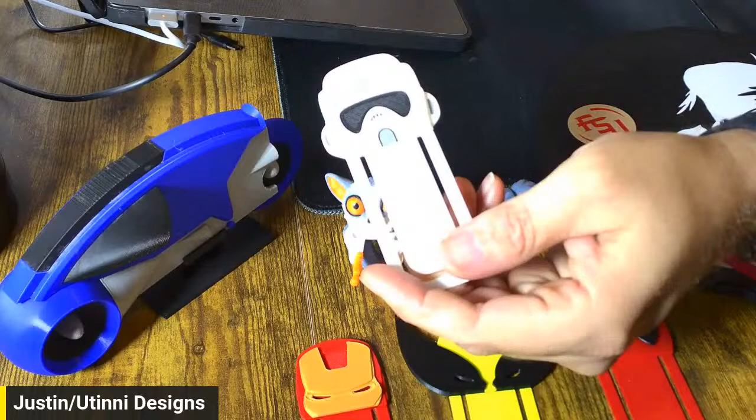Now you have different types of multicolor prints. You have prints that actually print multiple colors in one print, like this. So it prints the white first, then it goes to the gray, then it goes to the black, and then it goes back to the white, and it keeps swapping colors until you have a finished product.

Same with this. This is a multicolor print, only 2 colors. This would be a 2-color print as well, and another 2-color print. Here, this little guy has multiple colors. So you have the gray, the white, the orange, the black. So there's 4 colors in this little guy, in this little flexi.

This bike, this Tron light cycle, is technically a multicolor print, but it's done in a fashion that you print different parts in different colors. So you don't have to have an AMS unit to create something like this. So you'd print the wheel blue, you'd print the fuselage blue, you'd print each of these windows separately in black, this window separately in black, this in gray, the chassis in gray, the rear wheel in blue, the rear wheel inserts in black, and then you snap them together or glue them all together.

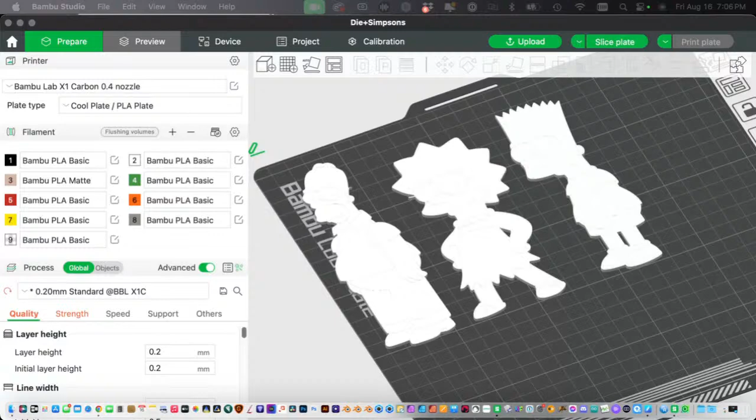So you can do this with a mouse if you want. I'm going to be using my tablet and a mouse in conjunction to paint these. So here we got some pretty recognizable characters. These are the Simpson characters. When you bring in STLs into Bambu Labs, some of them will have color if they're set up for an AMS already. Some of them will not.

Some of them will come in white, just like this. So you have your colors over here on the left-hand side. And these are all the colors that I have in my AMS currently.

So they may not match what I'm actually going to paint necessarily, but it at least gives you an idea. I'm going to click on Homer here, and then we're going to go up here to this little paint bucket, and it says color painting.

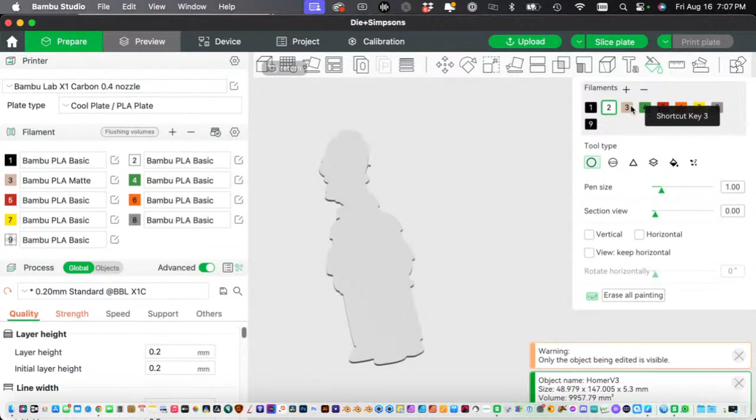And it's going to give me all the colors that I currently have in my AMS. You can click shortcut keys like it's showing, the number 3, so on and so forth, to quickly switch back and forth. Let me get rid of these warnings here.

So I'm just going to zoom in here, and you can do that with your mouse wheel. You can do that with your tablet if you have a button set up for it. And you can see you really can't see much detail when you first hop into this.

So what you need to do is you need to set up a color. Now I just set up white just because that's what I picked. You can set up black. You can set up any color you want.

So there's several different ways to do it. You can do it with the circle tool, which will literally take whatever color you select. Let me grab this color, and you can just draw it in there. Now, obviously, that's not accurate. That's for more fine detail work, so I'm going to erase that.

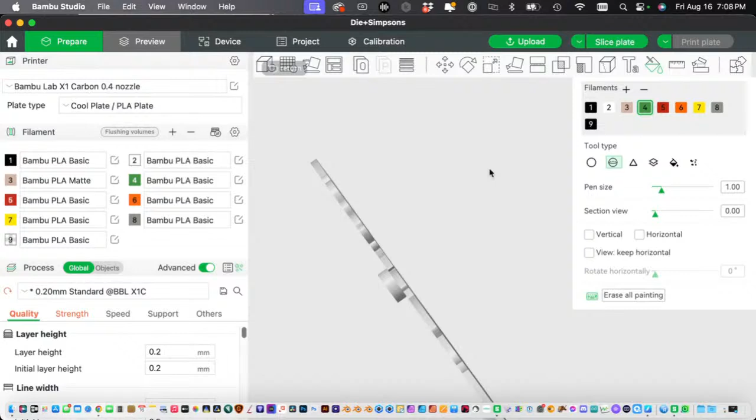The next tool you have is called the sphere. The sphere is going to be similar to the circle, but there are some changes to it. So I'm going to zoom in here. Let me make sure I got my buttons set up. So we're going to zoom in, and we're just going to rotate this.

And as you can see, it's very hard to see where the details are. But what this sphere does is it will take, I'm going to do it on this edge so you can kind of see what it does here. So as you can see, this is a flat plane and that's a flat plane. And see how it kind of changes?

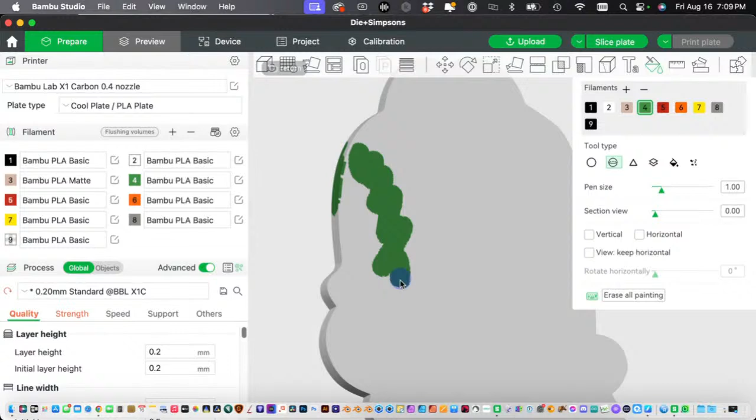So if I color it, it's only going to color on that flat plane until I reach the other side. Now see, this is just on this plane. And see how it's not really going to that other plane. It's kind of stopping. That means there's a separate object right there in the 3D model. So you can do it like this too if you want.

The easiest way, honestly, is to do a paint bucket. But let's go with triangle. Triangle is going to be the polygons. So as you see, when I rotate or when I place my cursor over, you can see the different polygons.

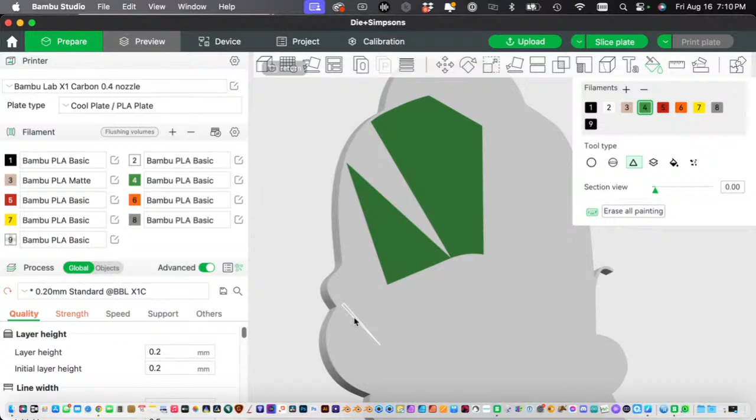So if I click on it, that's going to paint that polygon. And then I can click and drag, that's going to paint those polygons. Let's find, there's another polygon, there's another polygon, because 3D models are made up of polygons and triangles, especially STLs. Everything is triangulated in STLs.

So there's a way that you can paint certain areas depending on how the model is built and really get some fine detail in there. See how I got a space in between there. So that's a different polygon layer, but maybe I don't want that layer colored that color.

So then I can come in with a red and I can do those polygon layers until you reach the limit there. So that's the one thing that you have to kind of watch for is that limit area, and you won't know it until you really hit it of what that is. So you can really get some detail in there with either a mouse or a tablet pen.

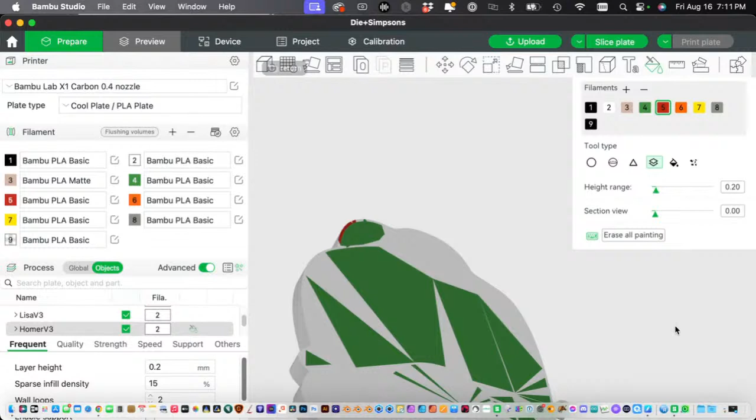These things keep popping up for some reason. The next is height range. Height range is just like it sounds. So I'm going to take orange, and as you can see, there's kind of a white line there, and that shows the height range.

So let's say I want orange on the bottom, and I want to go all the way up to this point. So from this point down, it's going to be orange. And let's say I want the other color to be yellow. So I grab that, I go back down. Now that's going to be yellow.

Let's say I want this to be black. So then that fills in that area of black.

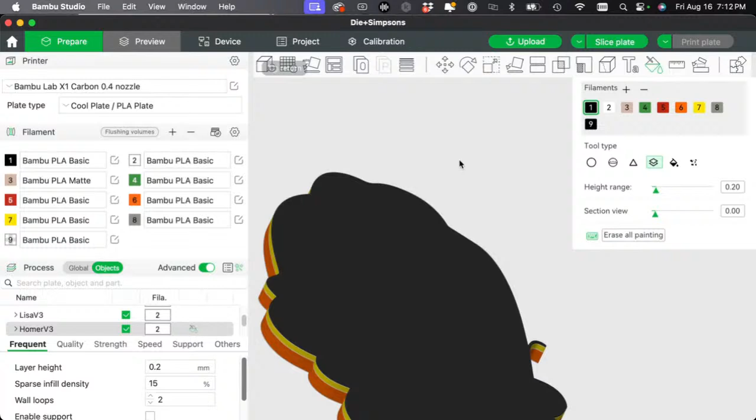So that's how you do the layers with the layer height, which is very quick to do, especially if you have separated models. You can quickly do a layer height and change the color. So like this is the top layer, right? I can click that, boom, changed. I can also come in and grab gray, make this gray down to this point, and then change this back to green. So you can see you can quickly do simple coloring that way, using the height range.

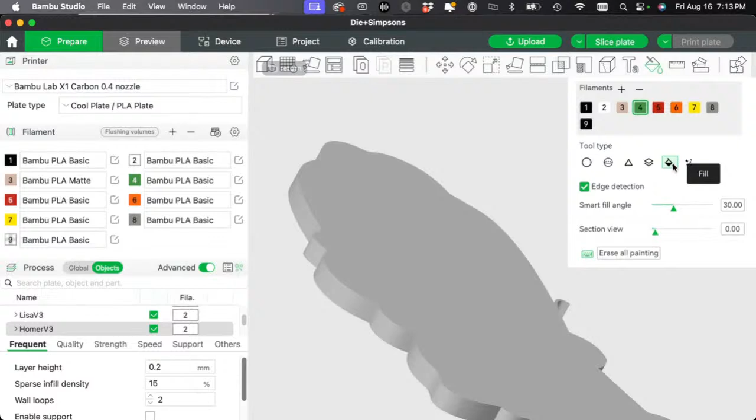I personally don't use that a whole lot because the way that I design my models, and the way most models are designed if you get them from good artists, is they're separated in a way where you can use a paint bucket and adjust this smart fill angle as high or as low as you want, and it will have a different effect on how it paints the model.

So I'm going to paint, let's get yellow. And you can see as I hover over certain areas that these are separate objects. So for instance, if I wanted to paint his pupils black, which they are in the cartoon... nope, we don't want that, so we will undo that.

Oh, excuse me, I actually cut that out. So we'll get back in here and let's do his face yellow.

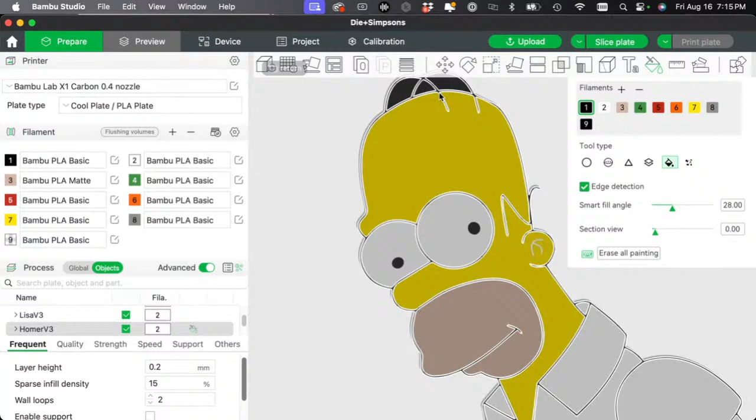Like I said, I don't have all the colors to actually do him correctly, so I'm just going to quickly show some colors here. Let's do his hair black, maybe, and then these lines here we'll do black. His shirt will make, I don't know, red.

See, I'm just simply clicking inside these areas that are already preset from the 3D model and from the 3D artist, so obviously his skin is yellow. I'm not really doing any painting, it's more of clicking. Let's do his boots black, and let's do this brown just for giggles. Let's give him green pants.

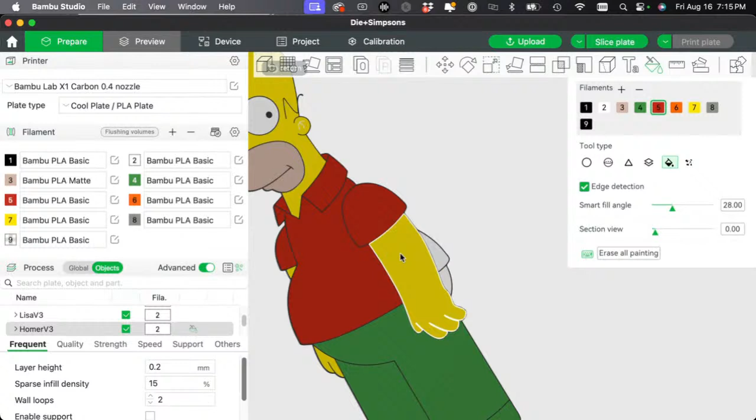So see, now very quickly, this is part of his shirt and this is part of his pants. So very quickly I have colored this in. Now there's still a little area here, so there you go. If you've ever used a vector program or anything like that, Photoshop, you know kind of how this works.

The tools are very similar. Now I can make this entire back plate a different color. So let's do that, and I'm just clicking and dragging to color these whole areas in. You can see how it switches to the different parts of the model. So on the edge, this is where you can kind of see how the model's split up. So I'm going to click and drag there, and you can see it just colored that part.

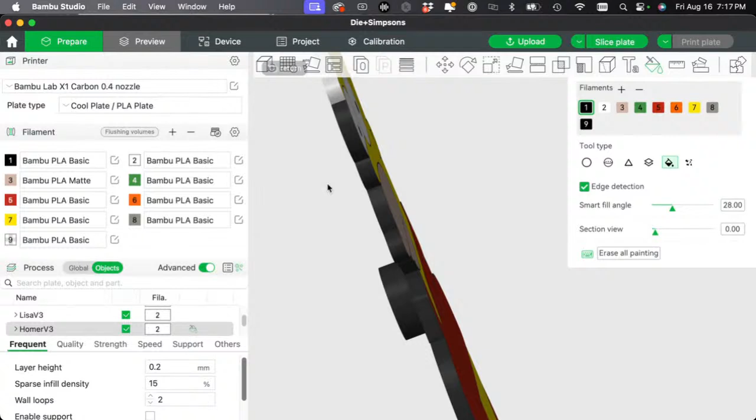So I'm going to click and drag, and then you have to rotate to make sure it got it all, because sometimes it will not. So you have to really analyze how you're coloring to get it all in the right places. You can always undo it if you mess something up, and you can always start completely over by hitting erase painting.

You can go here and you can see how you can paint with the left mouse button, and you can erase with shift plus left mouse button. So let's say, oh, I didn't want this black, so I hit shift left mouse button and it turns it back to the default color.

So we're just going to continue painting the edge, and then see this edge over here is not connected, so we will paint all this in. Again, I'm using a pretty high smart fill angle. If I lower this, it will paint even smaller pieces depending on how the model is set up. So see, normally it would have grabbed, see how this is? So now that's just those two pieces. Let me zoom in here.

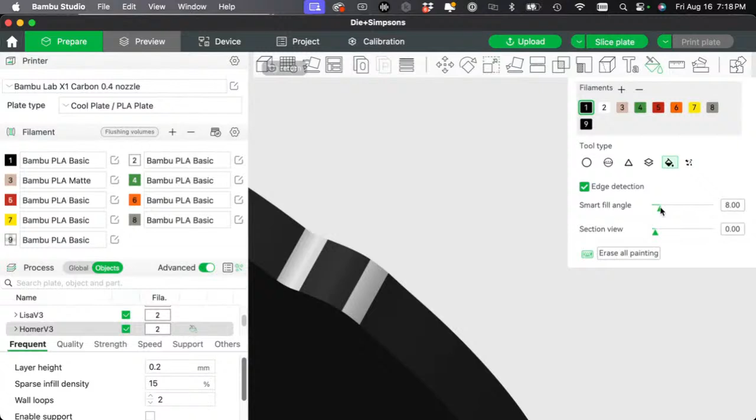Since I lowered my smart fill angle to 8 instead of 28, see how it's doing the smaller pieces? But if I raise it back up to 28, now it's going to fill in those pieces. So that's how you color in different polygons based on the size.

Now, not all models are going to be as simple as this as far as painting, and I'll show an example of that once we get this one kind of set up. So we're just going to quickly get in here, rotate it, make sure we didn't miss anything. Oh, see, we missed that right here.

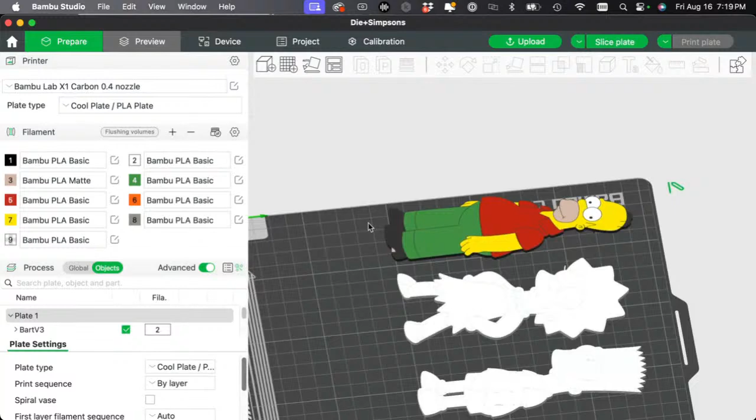Okay, so now we'll return to the canvas, and you can see that Homer is ready to be multicolor printed with those colors that I currently have in my AMS.

Now, when I switch colors out in the AMS, Bambu Labs will automatically detect it if you use Bambu filament, since they have an RFID tag built into the spools. So if I put blue in slot 4 and go to my filament and do a resync, you can see how this changes.

You can see how it automatically changed the color of his pants. So anything that was green in slot 4 to begin with, if I say I don't want him to have green pants, I want blue pants, I just load blue into the AMS slot I want, and it automatically changes it. Before his pants were green, now they're blue.

Now my AMS is updated, and these are the current colors I currently have in the printer. So that's a really good way to quickly change colors.

A lot of times you'll download a model that may have been painted with an AMS, and let's say there's 4 colors. On my end, I may have designed the model where slot 1 is black, slot 2 is white, slot 3 is green, slot 4 is blue. But on your printer, you may have different colors in those slots. So when you bring in a model and sync the filaments, it will automatically recolor based on your filament settings and what filament you have in what slots.

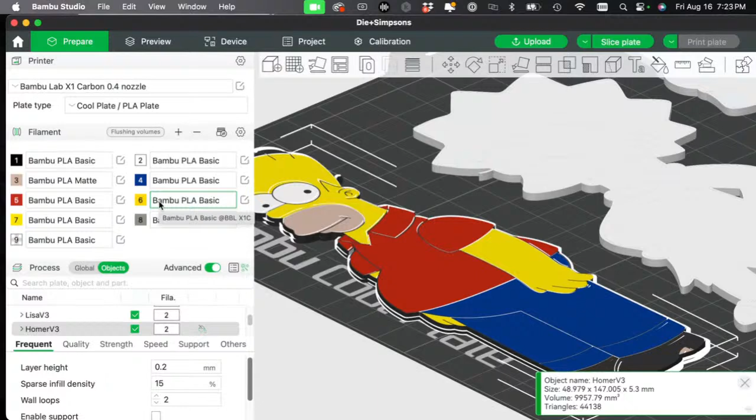So for instance, if the file calls for yellow in slot 1, I would physically remove the black from slot 1 and put the yellow in slot 1. You're doing this physically on your AMS system, whether it be the A1 Mini, the A1, the P1S, or the X1 Carbon — you physically move those spool colors and filament colors to the slots corresponding with the file.

Or you can do it the hard way, making sure you have the same colors the file calls for, and go in and paint it up. You just go in here and start coloring. The paint bucket is usually the fastest way to do this, but only if the model is set up correctly.

So let's give her, I don't know, red pearls and a blue dress. Let's go with black shoes. Yellow skin.

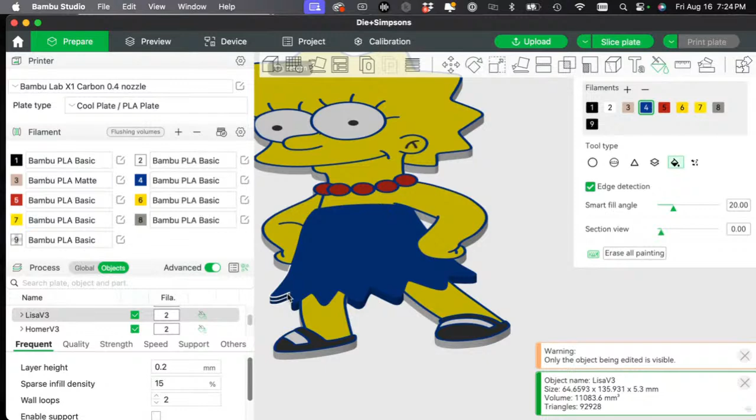Let's say I want this entire dress to be blue, so I'm just coloring in the dress parts. Okay, that looks good. Oh, there's that dress part — we want to undo that. See, I accidentally hit the blue on the black.

So then we're going to have this black back here, back here, back here, there and there. You can see how quickly I can do this if the model's set up correctly. So we want all these to be yellow for her skin, and we want this to continue red, same with this.

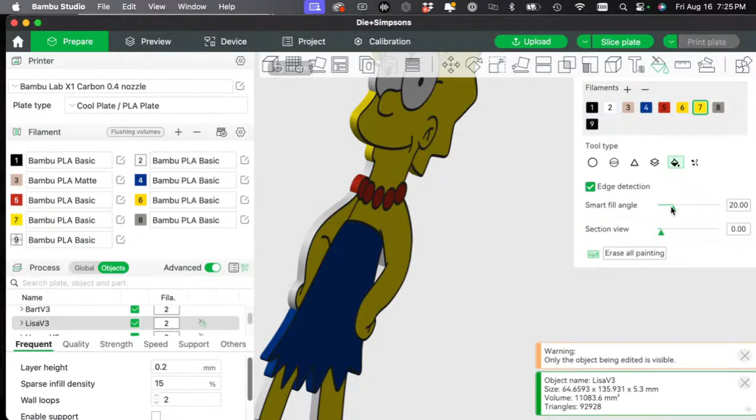So that's how quickly you can do it. And like I said, you can adjust your smart fill angle in order to match up to the polygon. So if you want finer detail, let's zoom in here.

Let's say I want different colors on here. I'm going to lower my smart fill angle with the paint bucket, and come in here and make these two squares blue. I want these to be red—see how I'm just coloring those in? I want these to be brown or tan. So I can quickly multicolor something if I want.

Now, obviously that's not probably what somebody would do because it's not realistic to the model, but you see how it's only filling in these. If I raise my smart fill angle back up to 22 or so, now I can do bigger pieces.

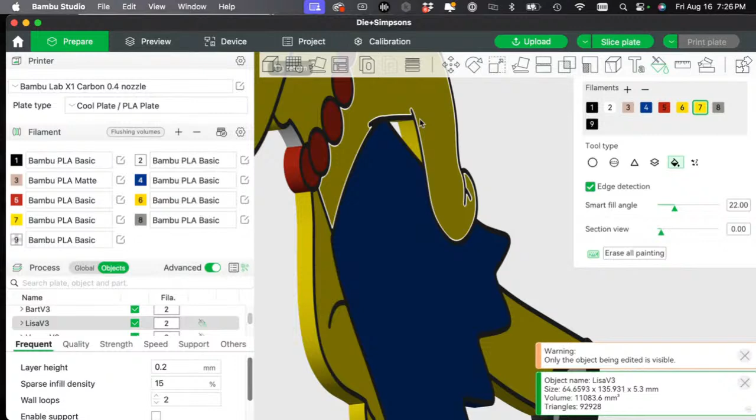So that gives you a quick overview of using the paint bucket, and this is on models that are pretty much set up for it already. You won't really know until you bring in your model and start painting how it's set up. These are set up pretty easily because they're designed to be fridge magnets, so they're very simplistic 3D models, basically extruded straight up. That's why it's a little easier to paint these than others.

So see, like this will be black here on the eyelash, and then you have yellow there, her eye is white. And now we're done—so now we've just painted her too.

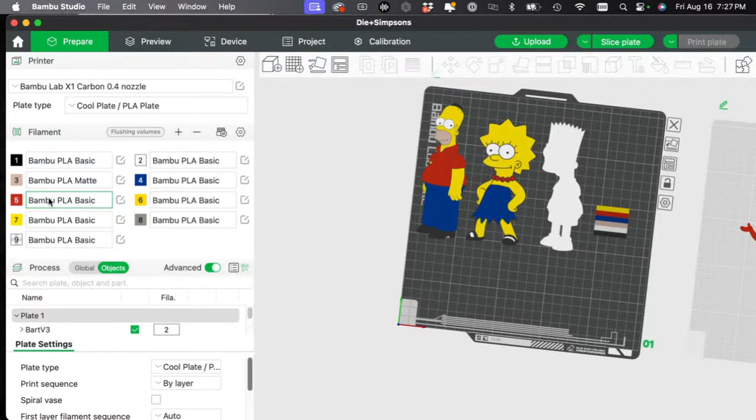And you can again change the colors. So if I physically swap my number 4 color from blue to red and refresh, her dress would become red, and anything that's red would become whatever color I put in the number 5 slot. So that's a quick way to color that type of 3D model.

So let's get into something a little bit more complex. I do not want to save that. Let's bring in a more complex model here—this is that little creature I showed you on the other camera. Bear with me for a second and I'll grab it. I'm going to switch to my other camera so you can see this.

So we're getting ready to paint this little guy. He's a lot more complex than the Simpson characters we were just looking at, which are basically extruded shapes like this. So it's going to be more time consuming and complicated to paint something like this. Again, it also depends on how the artist designed the model.

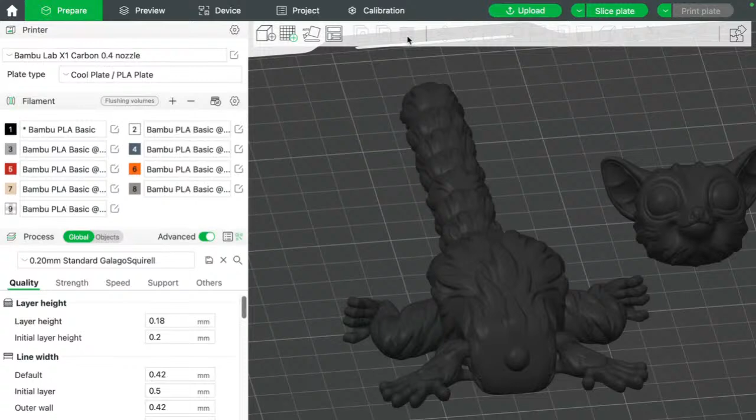Hopefully y'all can still hear me. Can you still hear me, Gap? I think it's Gap who's watching still. Might be a delay. Hopefully you can still hear me here. Let me double check my audio—yep, looks like it's still going green.

So all right, this is a more complicated model. As you can see, there's lots of crevices and some parts are separated because it's a flexi model. So on this side, I have already painted him.

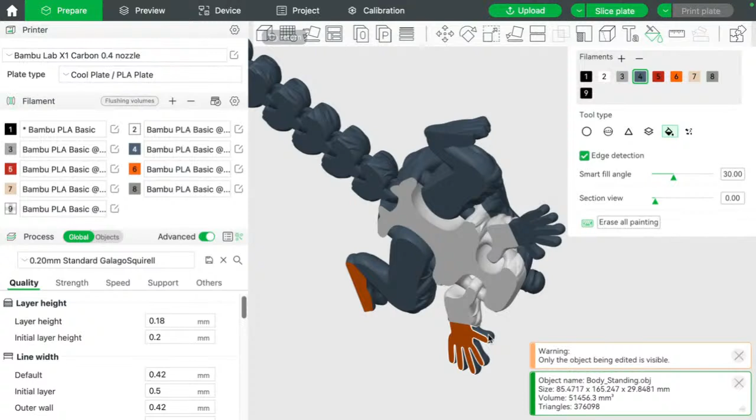What's nice about the way this is designed is if I go in here with the paint bucket and have the smart fill turned up to 30 or so—let's say I want his feet blue—with the smart fill turned up, I can turn his entire, whatever was orange, almost blue. And let's say I want his body to be red, so I can come in here and see how quickly you can change the colors if they're already pre-painted.

Because it's just like Illustrator, it's going to adjust those colors based on the fill. So if they're all white or whatever, you're going to have to play with it, but if it's already set up in a color, it's going to fill in that color. And then you may have to go in there and change some of it a little bit because they're separated objects. But that gives you an idea of how quickly you can paint something that's already been painted.

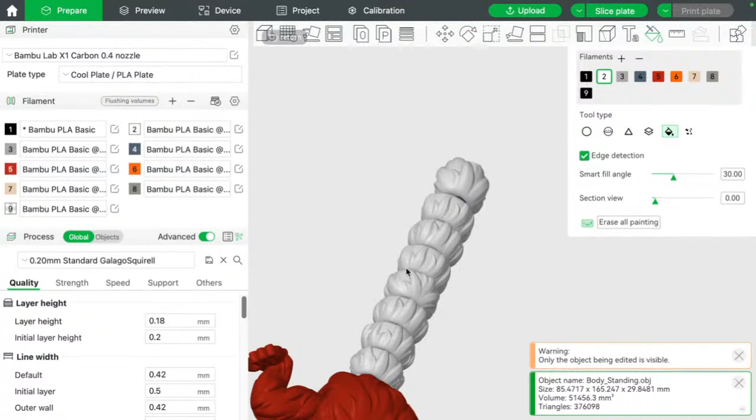So let's go into this one that has not been painted and see how that reacts. Currently it is black. I'm going to switch the body to gray, and I have my smart fill angle turned up. It looks like it did pretty much most of the body here. Let's do the tails, and let's just drag it all the way through.

Let's do the legs—now see, it's also coloring the feet, which I don't want, and it didn't catch that area there. So on the feet, let's make them orange, but let's lower our smart angle down to 3 and see how it grabs it. Okay, see how it grabbed just the hand and just the foot?

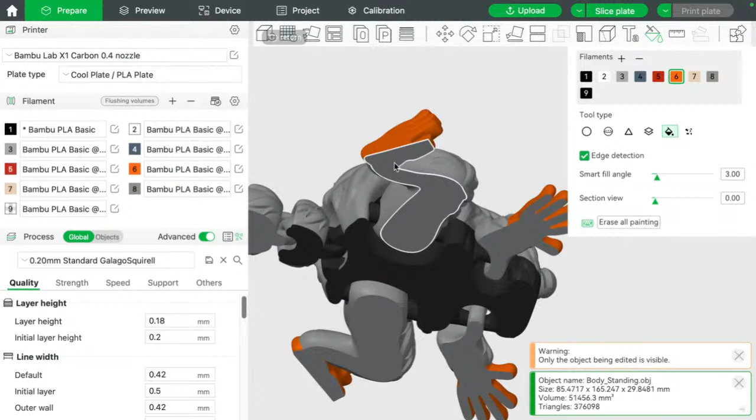But see, when I click on that, it colors the whole leg, right? So let's undo that. We only want this part to be orange. So let's lower our smart fill angle. And let's say we just want that part. Again, it's completely subjective and up to you, but you can see how the smart fill angle really affects how it fills stuff in. Now on something like this, the way this model is built, it's all one flat surface. So you have a couple options here.

As you can see, it didn't fill in completely these areas. So there's a couple different ways you can do that. You can go in with the triangle tool and you can raise this and fill those in manually.

Let's undo that. You can go in with the circle tool, which again will paint everything that is in that area. So let's undo that. You can go in with the sphere tool that will paint only the edges. See how it only did that edge, but it left that piece there. And then see how it's kind of highlighting that. So I can lower this pen size down and get just that piece.

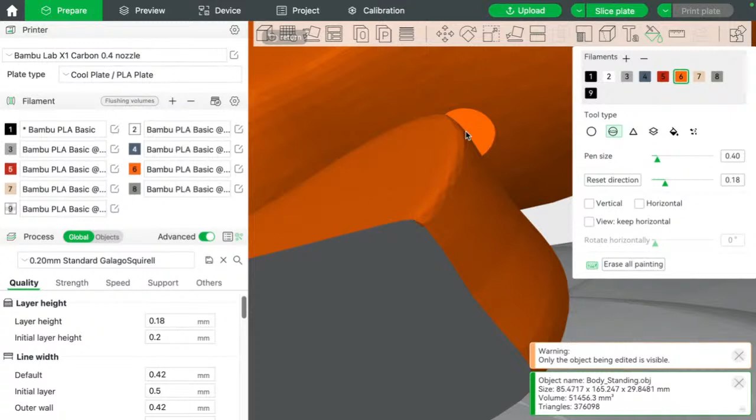You can turn these into models. I'm not sure what you mean. Explain that a little bit more if you can.

So now we've painted the feet and we just go around and check it. You always check your models because you'll get little areas in here like this.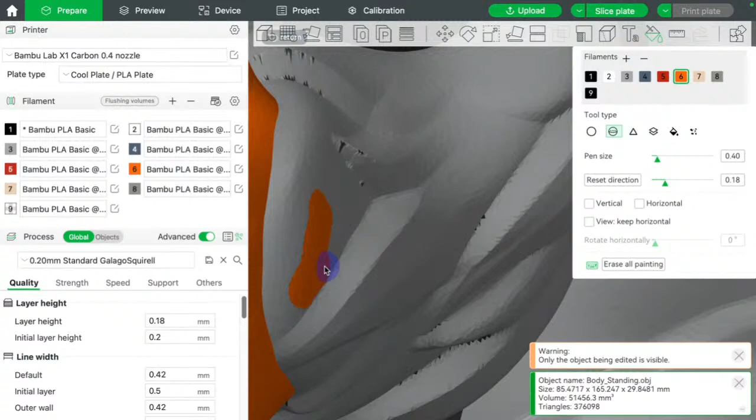Here's another example of the sphere tool and what it does. So you see all these little ridges and crevices that are different. Those are on different planes on the 3D model. So if I take this orange and I paint here, and then I go up to this crevice, see how it's not painting this other right here, even though I'm right up against it.

Let me undo that. Let's get this correct here. So let's do it this way. See how I can paint almost right along that crevice without getting the other piece painted?

So then you can go in and fine tune it even more if you want. See how that pretty much picked up all that? And then I can just come in here and use the triangle tool to maybe get it a little bit better.

If that doesn't work, then you can come in here and lower your reset direction, and we'll just grab that one. And then see, there's still a little piece right here. So we're going to grab that, and it fills it in.

So that's how you paint a little bit more complicated model. And just like before, once an area is painted, you can quickly switch it to a different color by using the paint bucket.

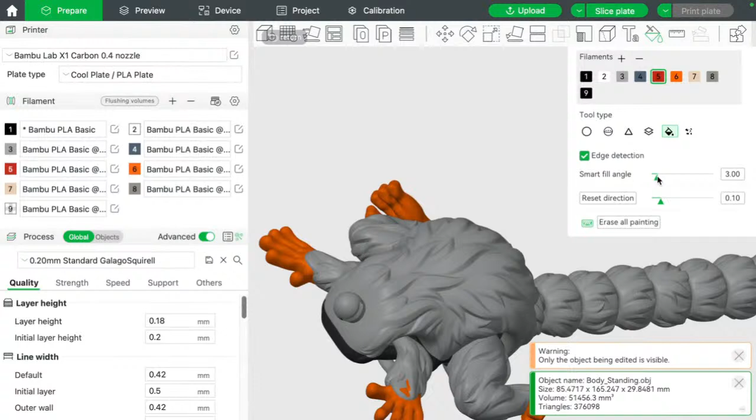And then see how it left all these little edges in here? Maybe I wanted that filled more. So I'm just going to raise this. Let's try it again. That's a lot better.

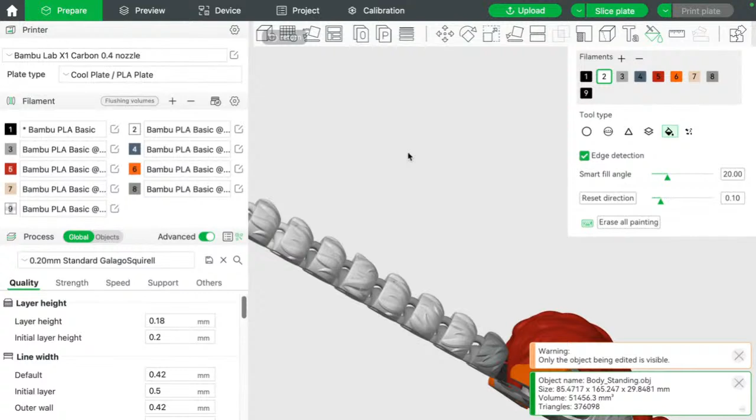And then you just keep looking at your model. You just keep rotating it and going in here and filling in the colors. And let's make this white. Let's do the entire tail, bottom of the tail white. And then let's make him kind of like a raccoon here.

Now these links in the center, we want those to be black as well. And let's see, what do we do here? We hit this one too hard.

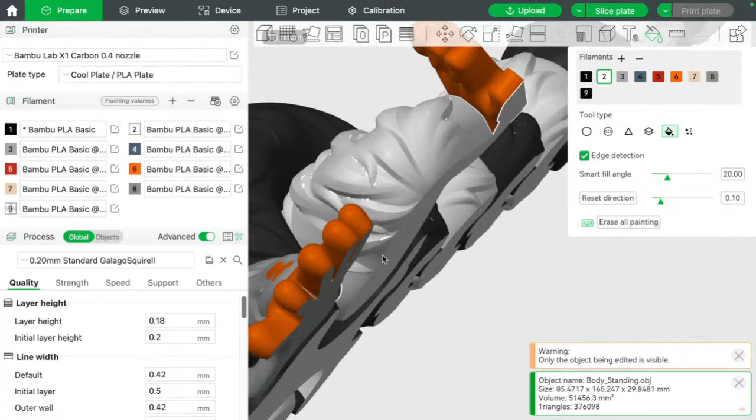And let's go ahead and make his body black. Let's make his legs white. So you can see how quickly you can do this if the model's done right. Now here's a good example.

See how I painted that white, but there's still that orange left over from what we did before. So there's several different ways you can do that. You can go back to your white and fill in those areas. You can also still see that there's a little bit of black, a little bit of orange. So you can take your sphere and color those in.

And again, this is with a mouse. You can do it with a tablet. Let me grab my pen. And it's the same concept. You're just coloring in polygons. Okay, so color these in.

And hopefully you get that kind of idea. The other way that you can do it is, let's find a piece that still has some areas. Okay, so like this arm here, this has some areas still.

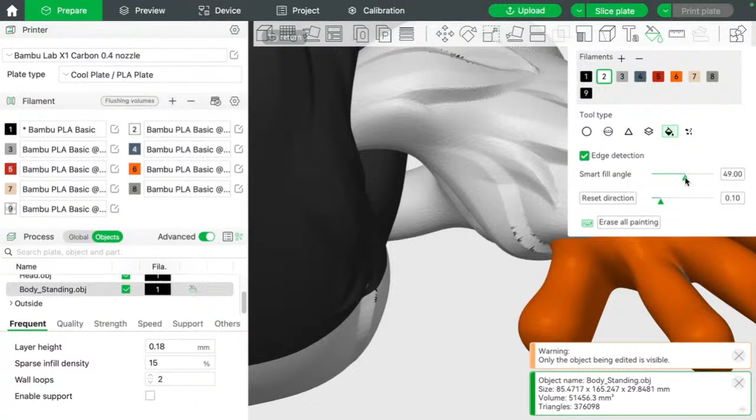So let's grab the paint bucket, let's raise it up to 49, and let's make this beige. Now you can really see the other areas, and you can just click and drag with the paint bucket over those areas that are highlighted in white. Those are unpainted, not the same color areas. So I'm just clicking and holding down and dragging, and it'll pick up most of it.

If it doesn't pick up some of it, you come in here with your sphere and paint it in. So like these, it didn't pick up these. And you don't have to get every single polygon.

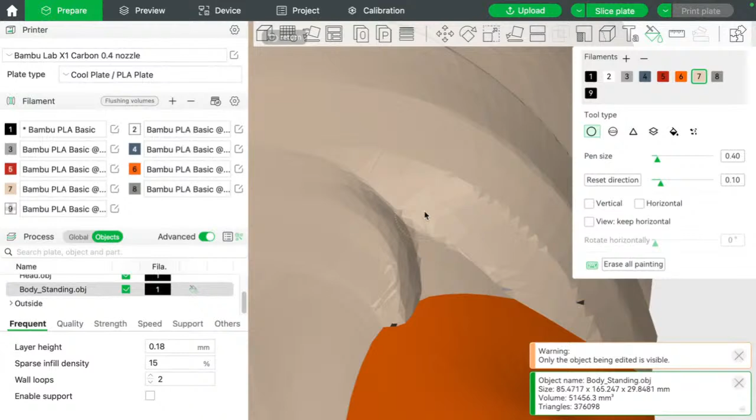But if you notice when you go to slice this, there are colors in there that are not part of your model. So let's say I just wanted beige, red, black, and orange. If I go to slice this, it's probably going to have more colors than that.

So let's see what happens here. Yeah, it has black, white, gray, red, orange, tan. So we know we have tan in the model. We know we have white in the model. We know we have black. We know we have orange. And we know we have red. Where's the gray coming in at?

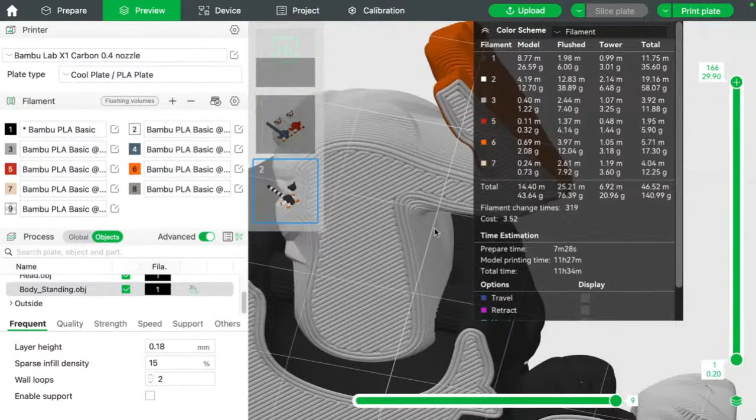Right here. We didn't paint that part. See how that's gray right there? So we will fix that by going back to prepare, back into the paint bucket, and we're going to make that white. We're going to make this arm white. Make sure it got most of it, if not all of it. So now we're going to make this black.

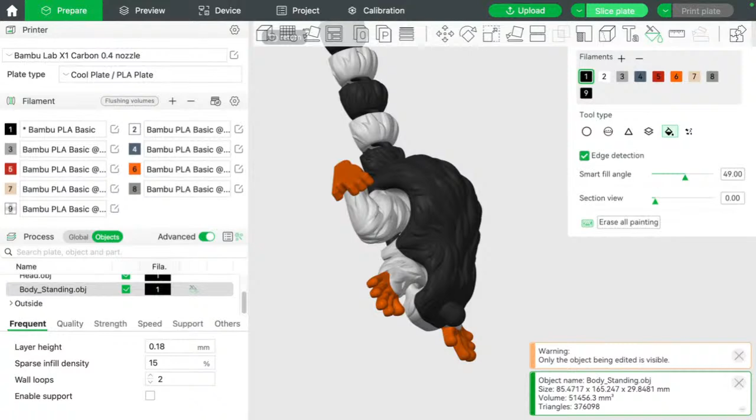To move around in here, you hold down your left mouse button and it will rotate as long as you're not clicking on the model. The moment you click on the model, you're going to be painting, so you've got to be careful with that. To zoom in and zoom out, it's the scroll wheel. To pan, it's putting the cursor anywhere on the screen, holding down the scroll wheel and moving. If you're using a pen or a tablet, it's the same way. You hold your pen on that canvas and you can rotate.

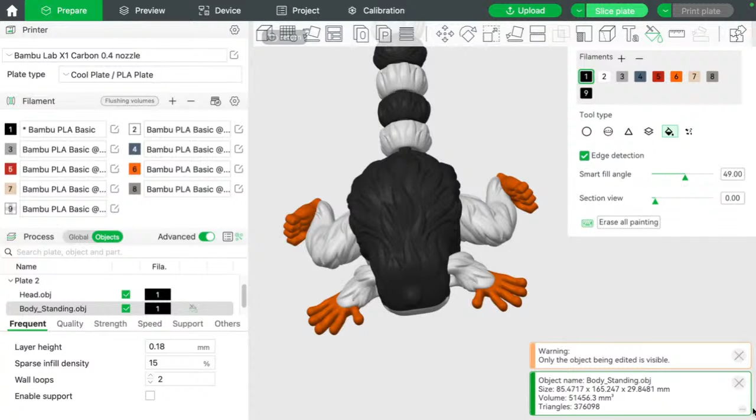And then there's other tools right here, so you can do different views. You can hold Alt and it will paint, so on and so forth. This is still rotating the model. You can hold down Command and it'll still rotate it. You can hold down Shift, it'll still rotate it. Zoom in, I believe, is Command plus, but that doesn't seem to be working. So just use your mouse, unless you have your tablet set up with certain key functions and key mappings. That would be the easiest way to accomplish that.

So now that we've changed those colors, remember before we had gray in there. If we slice this again, it should only have the colors we've painted, unless you missed something somewhere. If you missed a little piece of red or whatever, it's going to pick that up. So we have red in here somewhere, because see, it's going to print black, white, gray, orange, and red. So where is the red in this?

Sometimes you can see it in this view. It looks like it is a top color, and the reason I say that is you can see the red here on the purge tower.

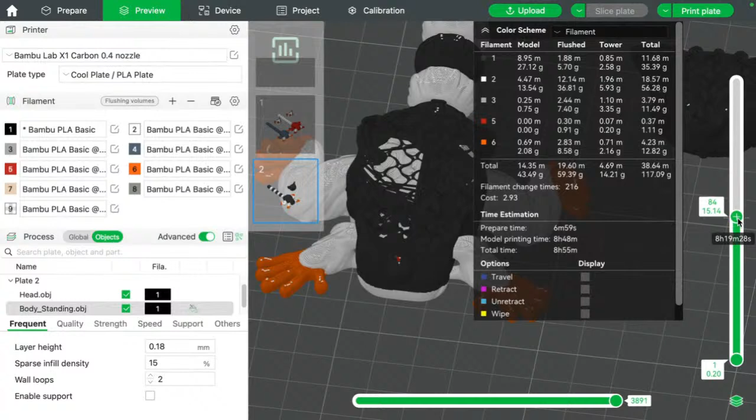Where is the red? You can also use this layer view and it will show you how it builds the model. Now see, there's red right there. Just a tiny bit, it isn't much. It's not even a gram of red, but it's there.

So let's fix that. Let's go into our paint bucket. Let's change all this to white just to make sure we got it. Then we'll change it back to black. Change this bottom part to white. So we're going to lower our smart fill angle.

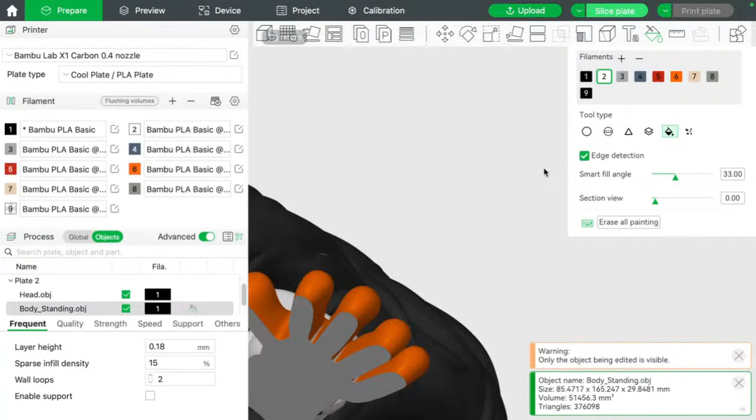And let's look at this a little bit closer to make sure that we got the red out. Looks like we may have. So slice it again, excuse me. And then we check to see if red's still showing up. If it is, then we try it again. Red is still showing up, but is it showing up in the area we had it before?

Right in there, that's what's called an interior polygon, and you may not be able to paint that. But it's not using hardly anything. Actually, all it's doing is not putting any in the model, because this column shows how many grams of each color filament is going into the model. You can see 0.0 grams. It's flushing the red for some reason, putting red on the purge tower with a gram total of red there, but it may not actually be putting it in the model because the model shows 0 grams. There are ways around that.

So obviously you can take red out. You can go back into your paint, erase all painting, and then start again.

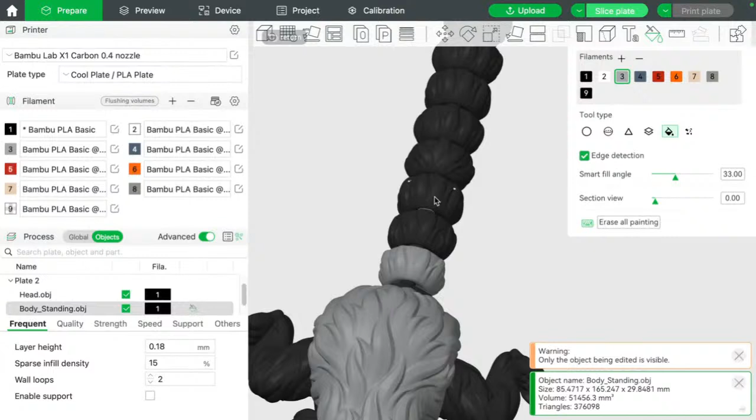So let's say I want this gray. I'm just going to do this quickly since hopefully you get the gist by now. Let's do this white, let's do his arms white, let's do his feet—we're going to lower this back down. Do his feet orange. That one needs to be lower because it still catches, so we're going to lower this down from 17 to 14. And there we got the feet.

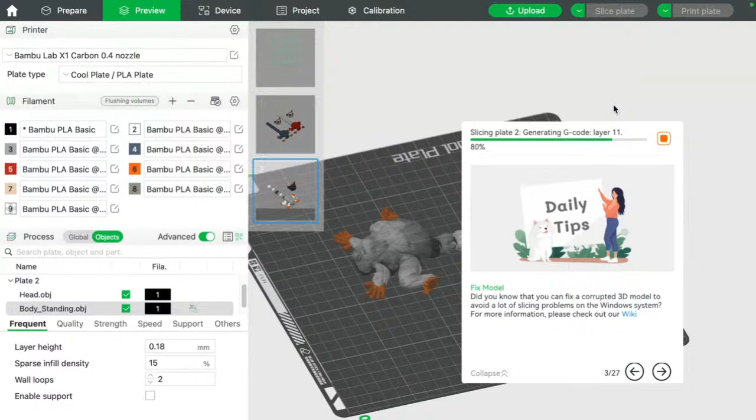So let's make the bottom side all black. And that's the quick and dirty version. Now let's see if there's any red in there, because remember, we erased all painting and then repainted it. And now there's no red in there—it's only those 4 or 5 colors we're using. So that's how you do that.

We can open up a new model. Let's go to home, let's bring in a droid. No, we don't want to save that.

So here's another way you can do it with painting. These are all grouped. If the model is built into different models or separated into different parts, you can color it that way. One way is you can split into objects. As you can see, it erased all the painting, so now this is a separate object, this is a separate object, and this is a separate object.

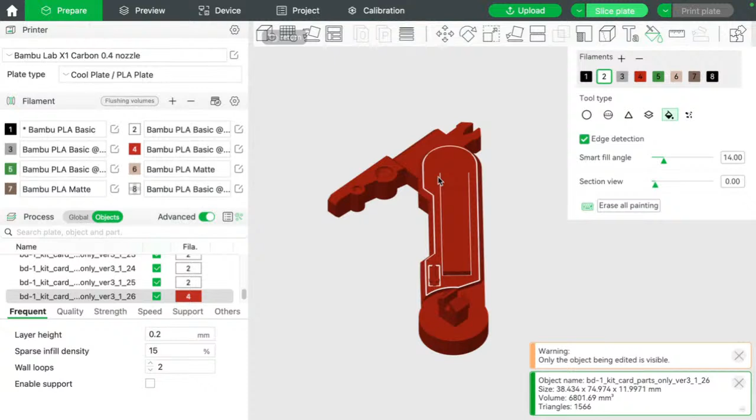So let's say I want that red—now that entire arm is red. Now I can go in here and I can still paint the different panels. So let's say I want this panel white, and I can just come in here and paint all these areas that I want that color.

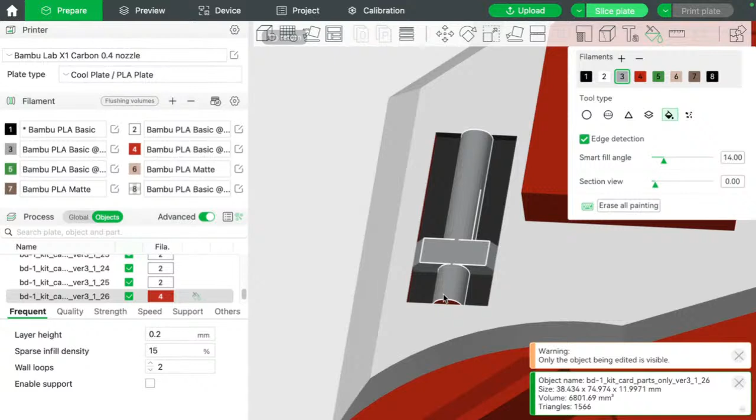We're going to make this whole back side white. Let's zoom in here, we want these edges white. We want this gray, we want this black, we want those little red areas black. Remember, these are all 3D models, so you have to make sure all your faces, all your triangles, your polys—because see, there's going to be red on this side.

So that's how you do it—I'm just using the paint bucket because that's the quickest way. You can use other tools if you like, but it's a lot quicker. See, I accidentally recolored that again, but see how I'm going around grabbing all these edges? And then I'm looking at the model from all the different angles.

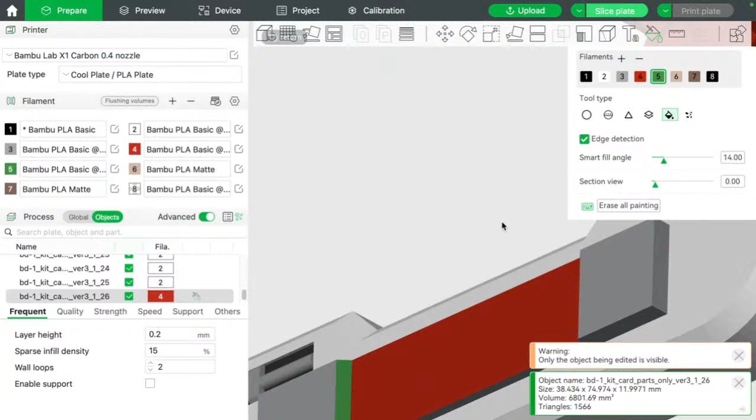Now I can move on to this part here. So let's make this gray, gray, gray. Let's make this area gray, this gray. Let's do something a little different on here—let's do this green, just for giggles. So you can kind of see how that would change the look of something. Then let's do this black up here.

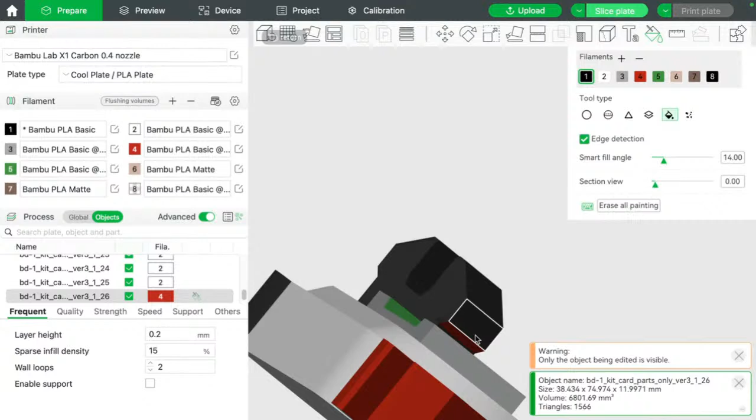I'm just clicking and dragging over these different areas to color them in. It's not going to get all of them because we can't see the back side, so we're going to have to rotate, and now you can see the back side. So it does take some time to color in these models. And keep in mind, the more colors you add and the more height differences there are, the longer it's going to take to print—that's one thing you really have to keep in mind.

So let's make this all black here, and I will show you the difference in speed of printing before and after we painted a leg here. All right, so let's keep that red just for the sake of it. We have a leg here, and I'm going to put this on a different plate so we get a more accurate time to print—the colored one we just painted on a different plate.

So the regular one, if you just print it in one color, it's going to take 17 minutes to print that piece. To print this piece right here, it's also 17 minutes, okay? Get rid of these.

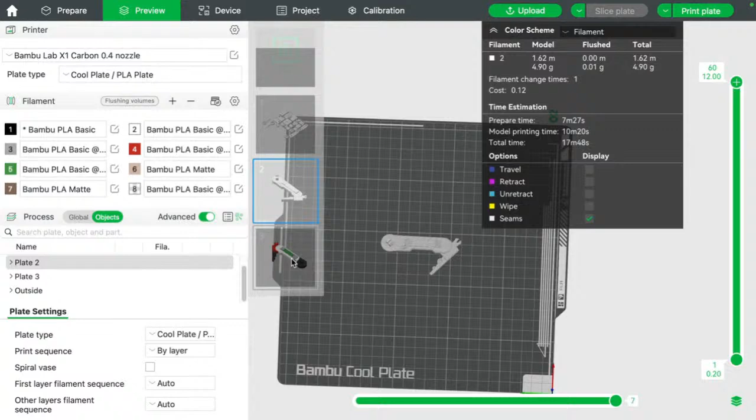So that is all one color, 17 minutes to print. To print the multicolor leg that we went in and physically painted with different heights, with different colors, so on and so forth, that's going to take 2 hours and 30 minutes to print. Same leg, same size, just multicolor versus one color. 17 minutes versus 2 hours and 30 minutes.

It's going to cost 12 cents to print this leg. That's going to use 4.9 grams in all white. This is going to cost 89 cents to print the multicolor leg. It's going to do 75 filament swaps and 35 grams of filament versus 4 grams of filament.

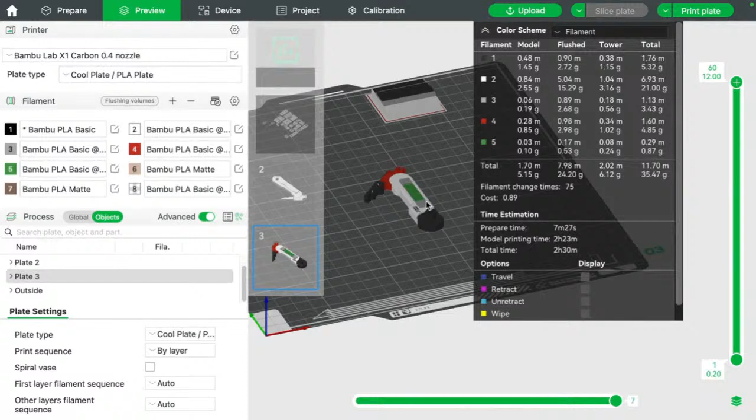So multicolor prints do take longer. They increase time. They use up more filament because you have filament swaps. So that's something you got to keep in mind if you're going to go crazy and start painting 3,000 different colors or 16 different colors. The more colors you add and the more height difference there is.

So this is all white, right? And then it changes to black. This is all white, then it changes to black, and then it changes to gray. This one is white, changes to gray, changes to green, changes to green, changes back to gray. So you can see how the printer is going to do it by dragging this up and down. So you can see it starts right here at all white.

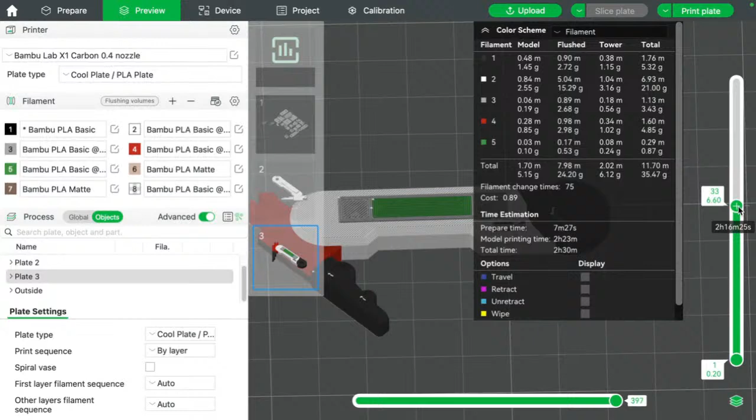Then layer 2, you use white, black, and red. Layer 3, white, black, and red. So it's changing 3 times. There's another 3 times, another 3 times, another 3 times. And it's just going to keep building up those layers and colors until you get up to here. Now you're swapping in another color. So you can see how that affects the print time, the filament swaps, the filament usage.

So that was just a real quick, kind of quick and dirty showing of how this works in Bambu Studio. Like I said, you can have real simple models that it doesn't take a lot of time on.

So let's go back to that Simpsons model here if I can find it. Well, let's do this one if it'll bring it up. Okay, so we have a West Virginia ornament. Okay, so if I slice that, it's going to take 38 minutes to print one ornament that size. 2 filament changes. You have the blue and you have the gold.

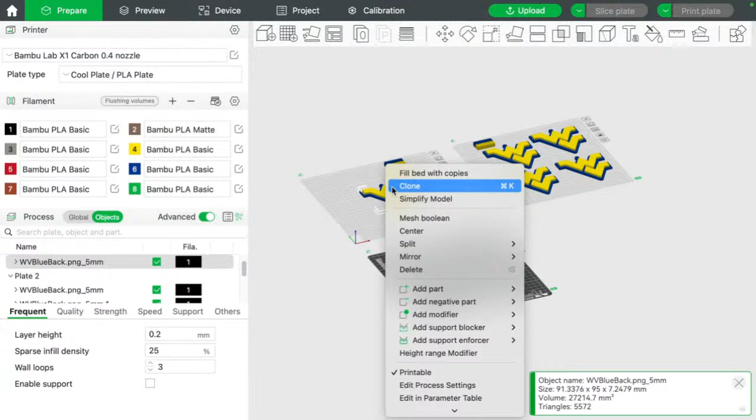Okay, now let's do this and let's clone it to that bed. And we are going to erase all painting, and we're going to make it one color. So let's just make it red. So a single color is going to take 34 minutes, and it's going to use 19 grams of filament. It's going to cost you 50 cents basically.

But you switch to this one, it's going to be 53 cents, 2 filament swaps, and 21 grams. And it's going to take 38 minutes to do that one. So it's going to take you a little bit longer, about 4 more minutes, and roughly 2 more grams of filament.

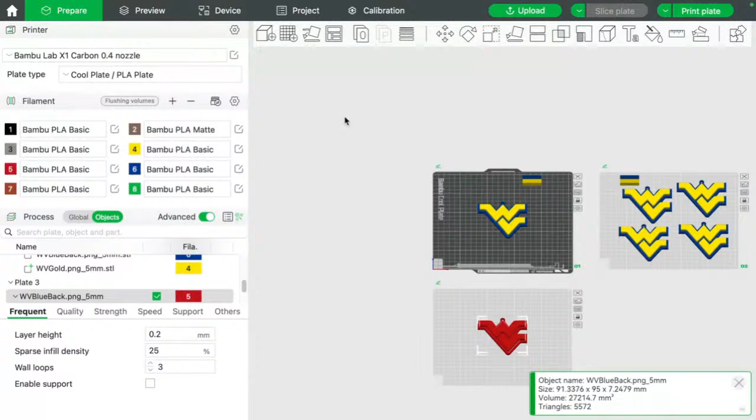Now, if you go in here and you go crazy, so now let's do this, and I will show you another. I'll show you exactly how the filament, the colors changes affects the print time. So let's go in here and let's say, hey, it's Christmas time. I want to put in some stripes or something. I'm just going to do this real quick and dirty.

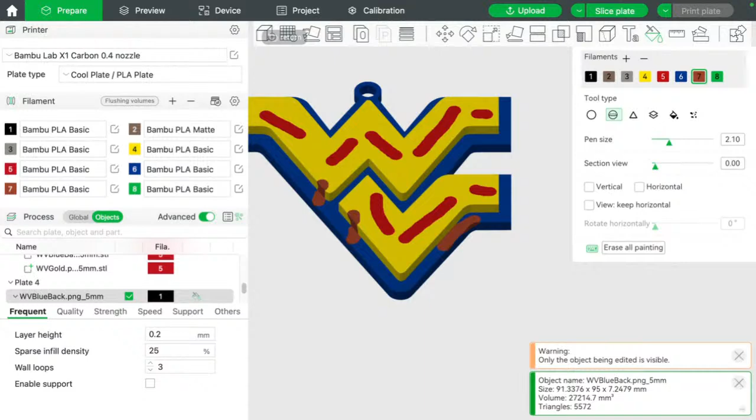Okay, so now we've added another color. Now let's go in here and let's add brown in here. Let's add brown here and here, here and here. Again, this is just for an example. So now let's slice that plate.

So one color, 34 minutes, 19 grams of filament. 2 color, 38 minutes, 20 to 21 grams of filament. Now we have 1, 2, 3, 4 colors. It's going to take an hour and 42 minutes. It's going to have 33 filament swaps, and it's going to be 32 grams of filament. So you increased your time, you increased your cost, you increased your filament usage, and you increased your waste, because it's going to waste 10 grams of filament almost right here doing all those swaps.

You can also play with that a tiny bit if you want. So you go back into prepare, you go to flushing volumes. I have it at a 0.65 flushing multiplier. I'm going to hit recalculate. And as you can see on the gray, if we were using the gray color, it says that there's not enough flushing taking place. You're probably going to get some color bleed. So let's bump this up to 0.67 and recalculate. Still not enough. Let's do 0.69. Recalculate. Still not enough. Let's do 0.75.

Still not enough. 0.78. Getting closer.

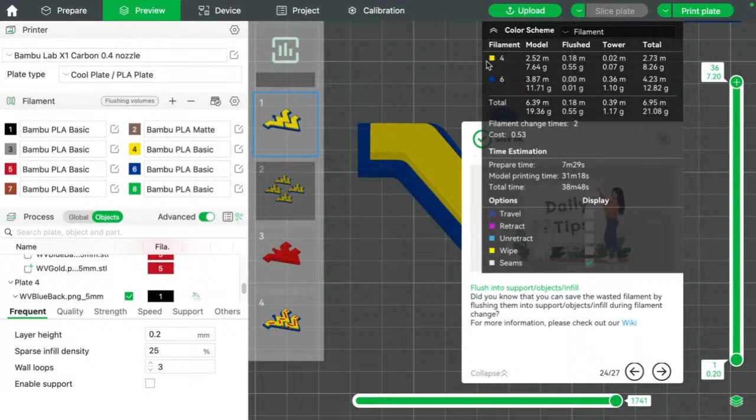So there's different things that you can do to limit the amount of waste, to color in different areas using the several different tools at your disposal in the paint area. So you can do it with the paint bucket, which is easy if the model is set up correctly.

So we can change this to red. We can change this to green. And we can change even the edges to different colors if we wanted to. But keep in mind, that's going to produce more waste, more filament changes, and therefore more time.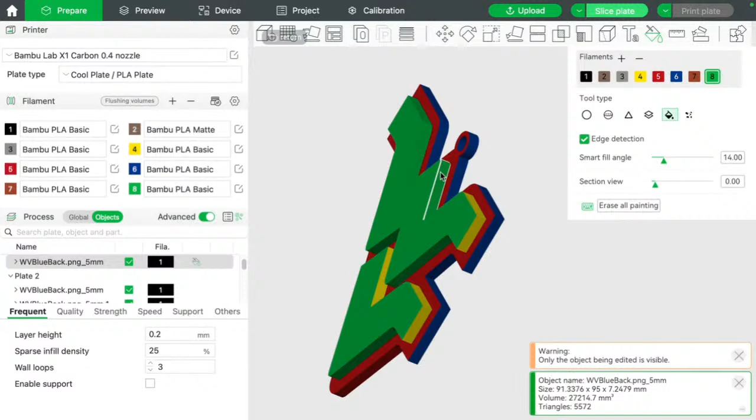So you can go hog wild on these things and make them look like a 5-year-old went to finger paint town and just had at it. Or you can make them more realistic by going in and painting just certain areas and trying to get it where you want it.

So like right there, we have blue, we got red, we got green, we got black, we got yellow. So then you can undo all that by hitting Control Z or Command Z on Mac, and you're back to normal.

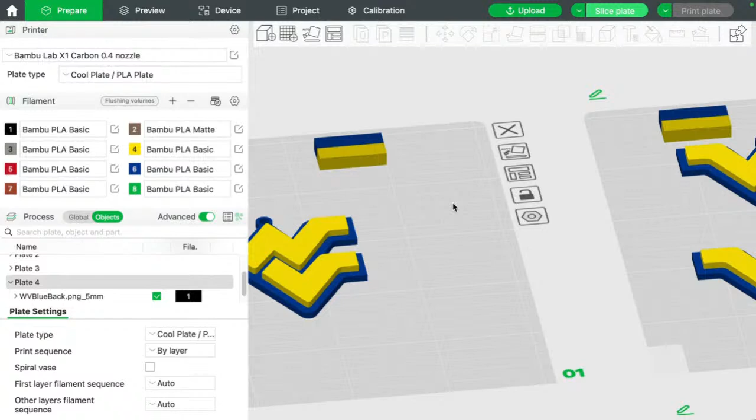Now, here's one interesting thing that you will notice if you do multicolor and you perhaps need to print more than one. Why? This is why. If I do just one ornament, it's going to take 38 minutes and 48 seconds. It's going to change the filaments twice, and it's going to use 21.08 grams of filament, and it's going to waste 0.55 grams plus 1.17 grams for the purge tower.

I'm going to print 4 of these. Even if you don't need 4 of them, look at the difference. You're still doing 2 filament changes. You're still doing the same amount of flushed filament, 0.5 grams. You're still doing the same amount of filament in the purge tower, 1.17 grams.

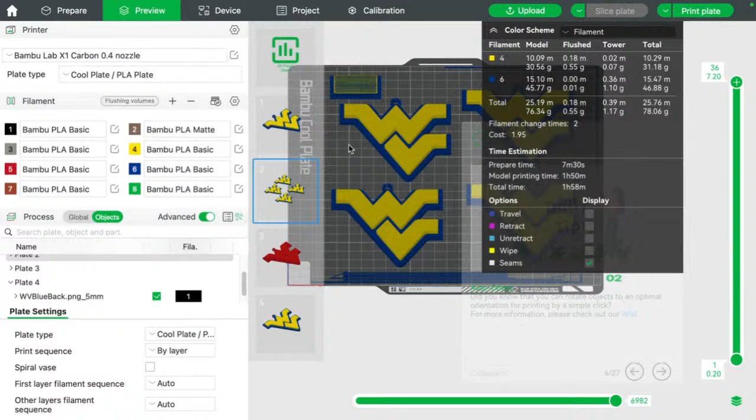It is going to take a little bit longer to do because you're printing more material. But because you're printing the same object and the same colors, you're not using that much more filament. So you're using 21 grams for 1, you're going to use 78 grams for 4. 38 minutes for 1, or an hour and 58 minutes for 4.

So if you can print with the same colors and the same model, do it, because you're going to save time and filament and wasted filament on the purge tower and on the flushing. So fill that bed up as much as you can, or print just 1 or 2. Maybe that's a good example. Instead of using 4, let's just do 2.

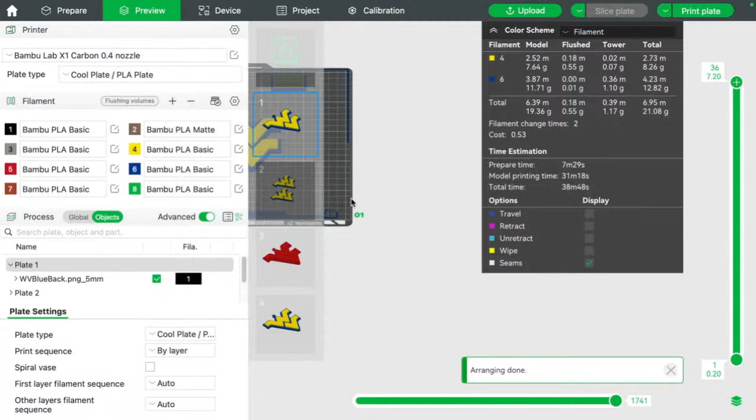Okay, so we have 1. Again, 38 minutes, 2 color changes, 21 total grams of filament with basically 2 grams of filament wasted. Now we're going to get 2 of them in an hour with 40 grams of filament total and the same amount of waste, and still only 2 filament changes. So you get double or triple or quadruple if you can fit it on the plate. Yes, it's going to take longer, but you're going to waste less filament because you're getting more objects for the amount of filament that you're using, if that makes sense.

Okay, so definitely take that into account when you're working with an AMS in Bambu Labs. And again, you can play with these numbers a little bit. You could recalculate. You could put this up to 1, let's say, because this was at 0.65. So all my numbers was based on 0.65. So now let's do numbers based on 1. Now we've gone up a little bit in time and just a tiny bit in filament.

Again, you're using double the filament, but you're getting 2, and you're not wasting double the filament, if that makes sense. So 53 cents versus $1, and you get 2 of them, already printed, ready to go, shipped to a client.

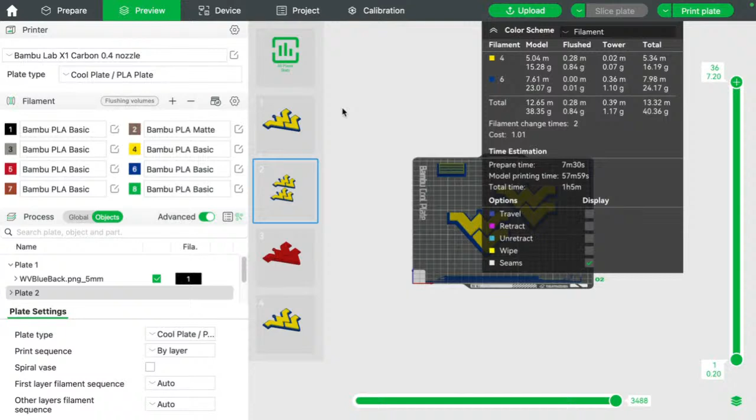I don't know how accurate these costs are because you can go in here and adjust those costs based on what your spools cost. So if you get your spools on sale, or buy in bulk, your cost can be way less than what this shows. This is just a guideline, not an exact down-to-the-penny cost analysis of what these 3D prints are going to take. You also have to factor in machine time, wear and tear on your nozzle, your belts, your build plates, your extruder. There's a lot of different things that go into pricing these 3D prints.

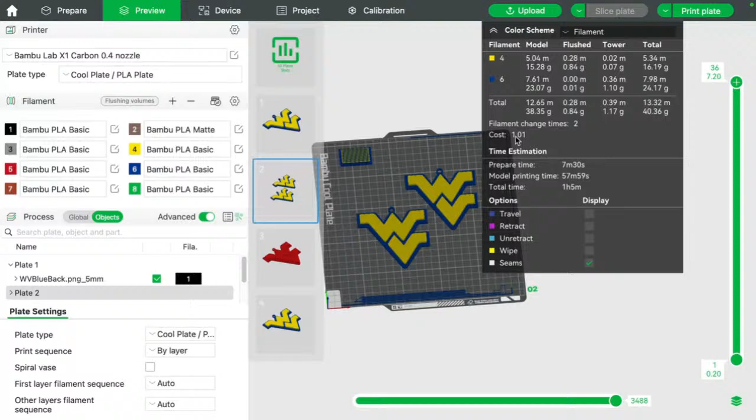So when you see this number and think, oh, I can get 2 ornaments for $1, why is he charging $10 an ornament? Because this isn't taking into account the printer time, my time, or the wear and tear on the printer, the nozzle, the feeders, the AMS system, the PTFE tubes—everything that goes into 3D printing is not taken into account. This is only taking into account, and not always accurately, the amount of filament you're using. It's not factoring in setup time, paint time, color changing, or anything like that.

So let's say you work at McDonald's making $15 an hour—right there is $15 just in the time it's going to take to print it. Are you really going to charge $1 for that if it took an hour? No, you're going to charge $16, maybe even more. That's where the pricing changes a little bit.

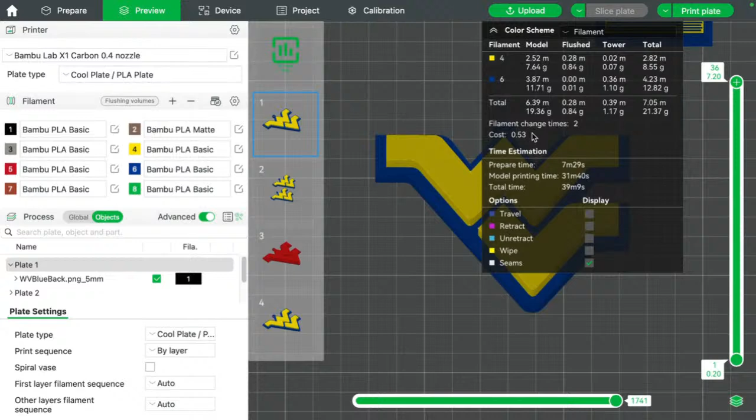So there's a couple different examples of how to paint models—a bit more explanation of costs, how different color changes can drastically affect not only print time but filament swaps and the amount of waste. In this example, you have 2 filament changes for 1 ornament, and it's going to take 21.37 grams with about 2 grams wasted, and you only get 1 ornament. Or you can do 2 ornaments with the exact same waste, using 40 grams—double the filament, same waste, but you get 2 items for literally 30 minutes more. So that shows the difference in how that works.

So let's go back to the WV. Again, if your model's already colored and you have an AMS system or multicolor system—for instance, this one is basically 4 colors—I could recolor this if I wanted.

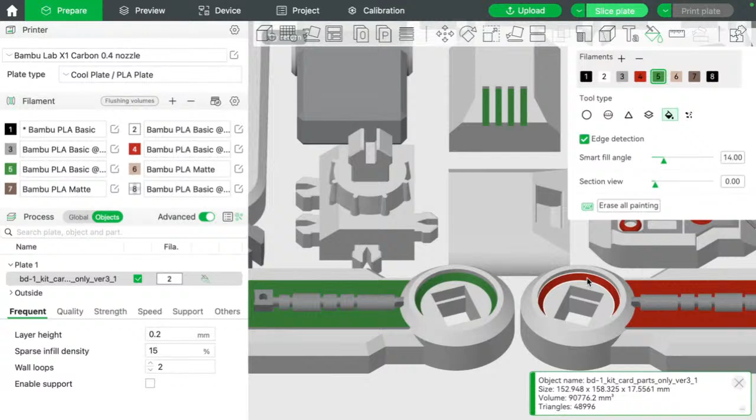I can come in with my paint bucket and make the reds green. You have to zoom in and look at all the different areas, and click or use a Huion tablet or Wacom tablet to color these in. Right now I'm just using the mouse because these are already set up, so it's very quick to change the colors.

You can come in here and get super detailed. Let's say on the base of him I wanted to write something. So let me get my pen out and we can write 'Spice Runners.' Now that will print 'Spice Runners' on the bottom in black. It'll take a lot longer to print, but it will do it. You can customize these any way you want—that's what's nice about it.

Want to get into a little more detail? Let's say I wanted a pattern like this, just following the polygons already on the model. So let's say I wanted this red, this one, and this one, and this one, and there isn't one there.

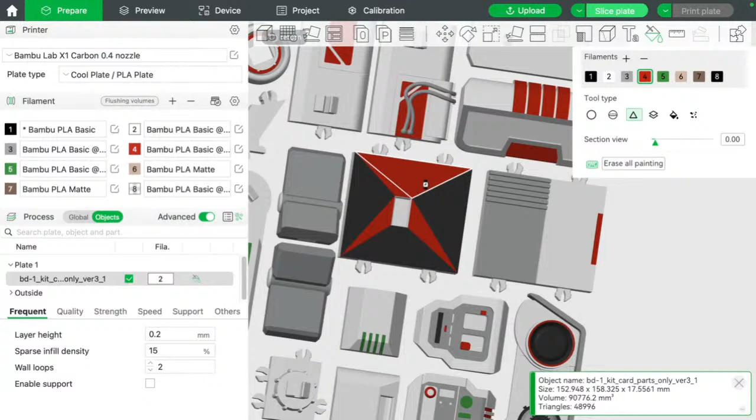So that may not really work, but that gives you an idea of how you can quickly change stuff. And again, if you bring in a model and it's already pre-colored...

So for instance, I brought in this model. Let me see if I can back up all the way. There we go. It was basically using white, gray, black, and red - 4 colors. Then I come up here and refresh. I may not have the same colors in my AMS, so see how that drastically changed it? Because these are the colors I have in my AMS. So I have a couple options.

I can go in here and repaint these if I want. So I think this one was gray maybe, so I can come in here and paint this gray. This was black, so I come in here and paint that black.

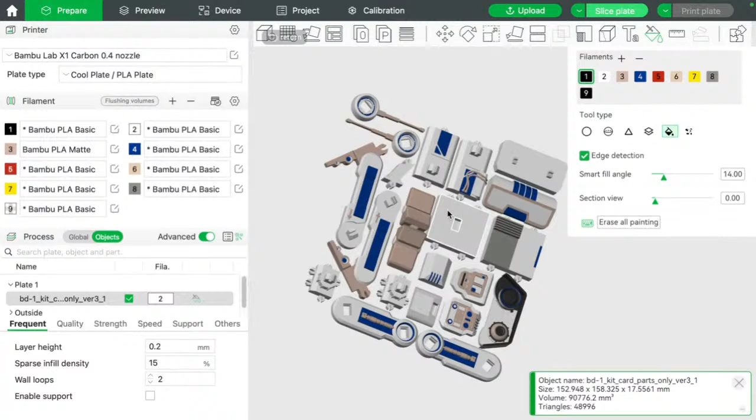The other option is to... let me reload this so we get the original colors back. So these are the colors that the original artist intended.

If you have an AMS, the other option is to physically swap the filaments in your AMS for the slots listed here on the left side. So if I have black in slot 2 instead of slot 1, I physically take the black filament from slot 2 and put it in slot 1. If I have red in slot 7 instead of slot 4, I physically take the red from slot 7 and put it in slot 4. That way, when you resync and set up your AMS for the software to look at it, it has the same colors as originally intended, and it will print just like the original artist intended it. Otherwise, you can go in and customize the colors the way you want.

So hopefully that gives you a little bit of information on that.